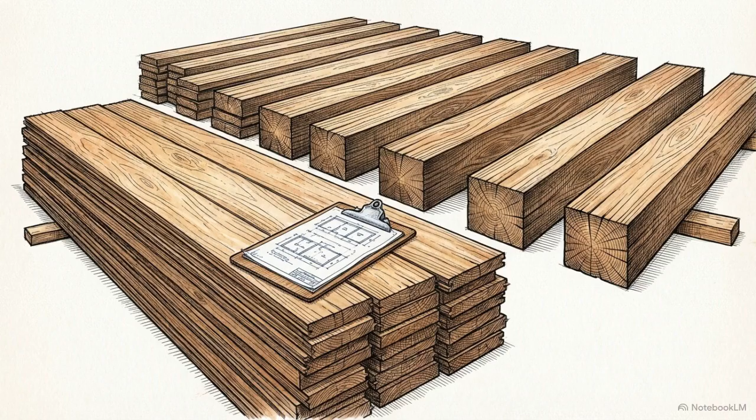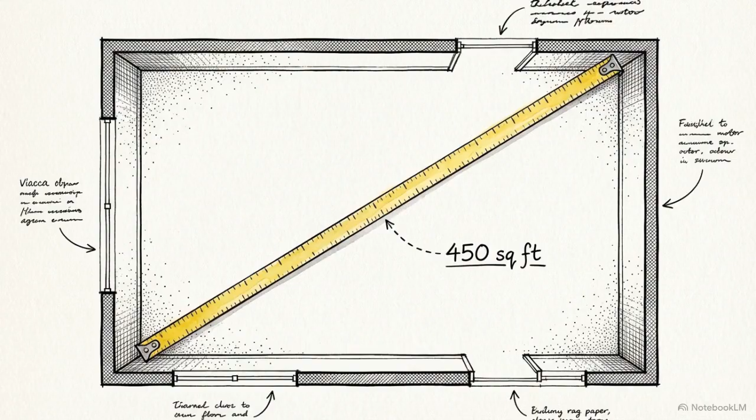Running these exact numbers before you begin construction is the only reliable way to avoid wasting expensive materials and to guarantee the floor can safely support people and furniture. Step 1 in our 6-part sequence is measuring the total floor space of the room. You take this physical area measurement and check it directly against those upfront material calculations to ensure you have exactly enough timber on site before you start cutting.

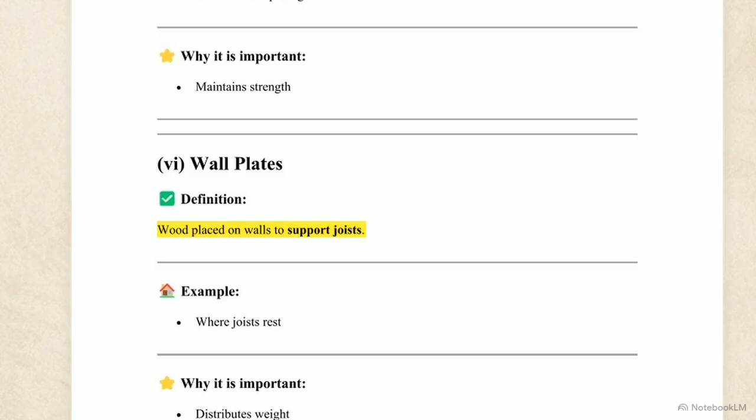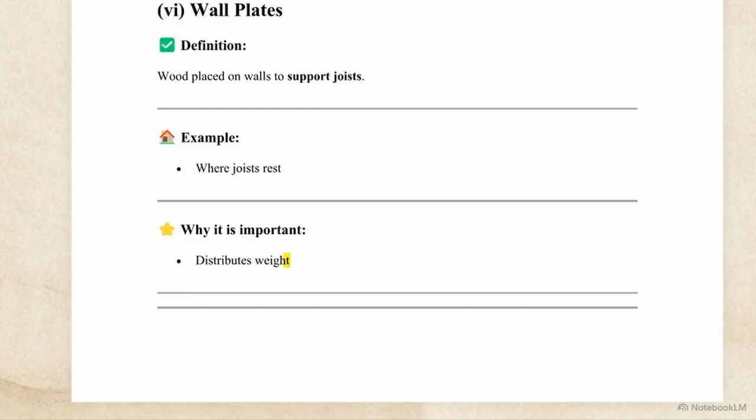Once measured, Step 2 is fixing the wall plates to the foundational walls. Here is the definition for wall plates: lengths of wood placed directly onto foundational walls. Their primary job is providing a resting place for joists, distributing the floor's massive weight evenly across the concrete base. Securing these plates perfectly level creates an unyielding structural baseline. If this lowest layer is crooked, every subsequent layer stacked on top of it will fail.

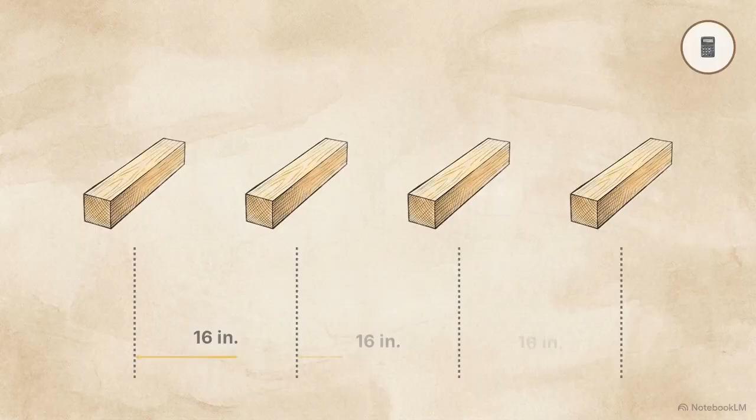With the baseline set, Step 3 is installing the joists so they rest directly on top of those secured wall plates. This section of the manual defines joists as the long wooden beams placed under the floorboards. They act as the main skeleton of the structure, carrying the actual physical weight of the floor itself. As you lay these beams down, you must space them completely evenly. This requires checking your level constantly across every single beam as you work across the room.

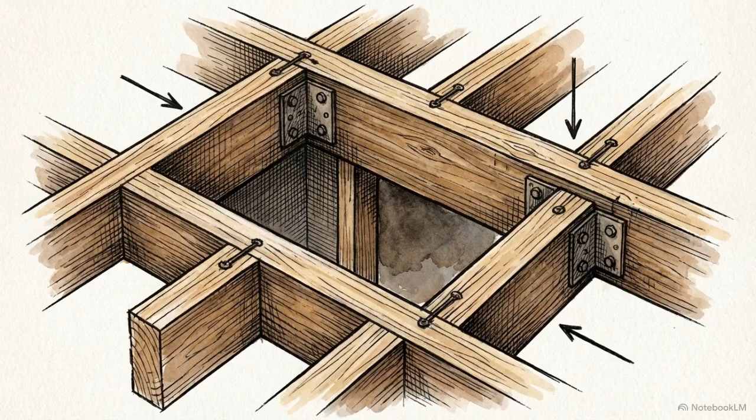When you cut standard joists to make that trimmed opening, you lose support. To fix this, you install a specific heavy beam called a header around the opening, which ties the cut joists together and maintains the floor's overall strength. The entire integrity of the floor relies on this grid. Rushing the spacing or failing to support trimmed gaps with a header guarantees a compromised floor.

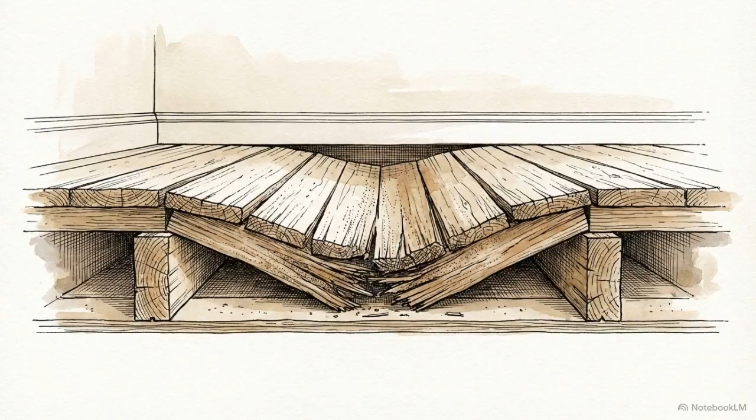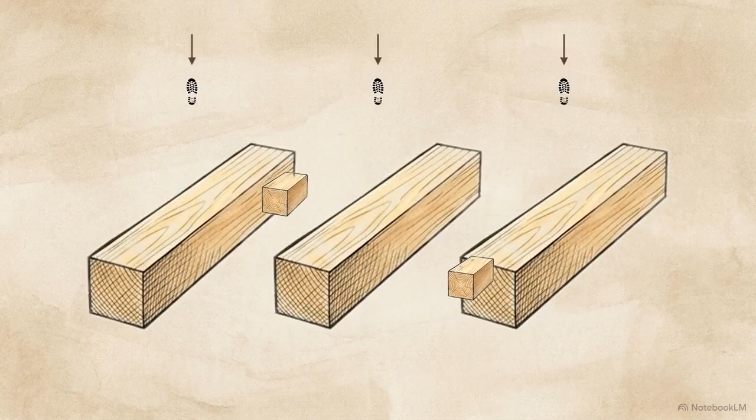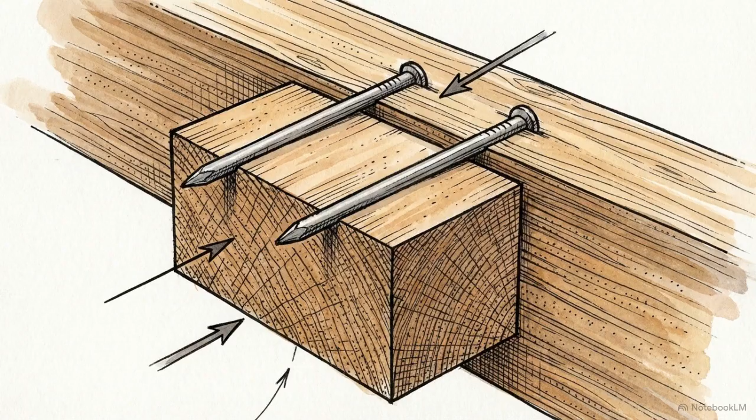With the main joist skeleton set, Step 4 is adding bridging. Bridging involves taking smaller blocks of wood and wedging them tightly between the long, parallel joists. These blocks act as mechanical braces. They keep the long joists completely steady and prevent them from twisting or moving side to side under the heavy load of foot traffic. Stopping that lateral movement now prevents the joists from rubbing together, which is the primary cause of floor squeaks. These connections force the individual beams to work as a single unit, which prevents the joists from twisting when you walk across them.

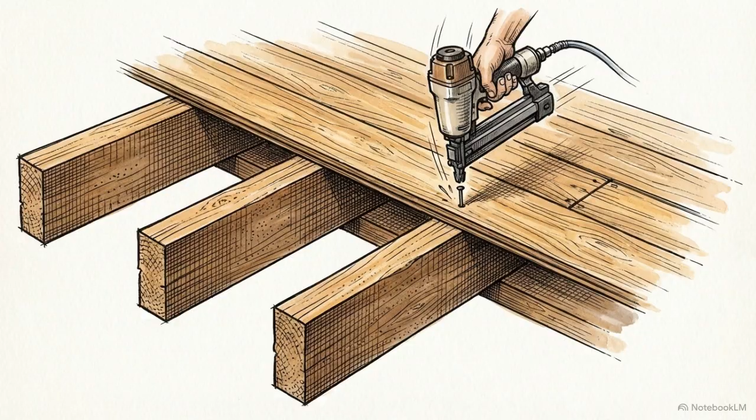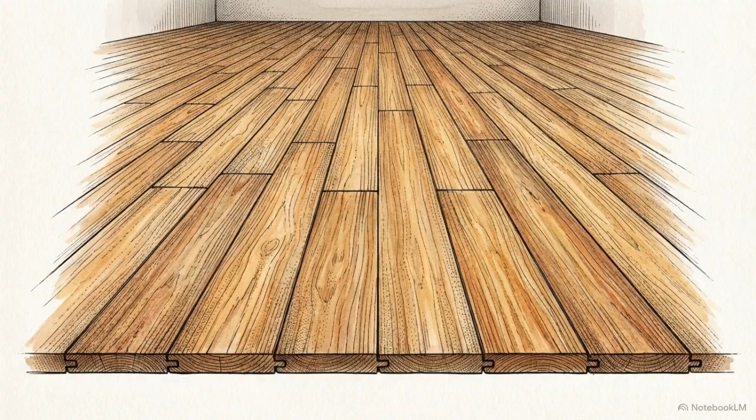Step 5 is fixing the floorboards securely across your freshly braced joists. Looking at our component definitions, floorboards are simply the top layer. Laying these horizontal wooden boards down over the joists physically creates the actual walking surface of the room. Finally, Step 6 is finishing the surface. What you add here depends entirely on the room's final purpose.

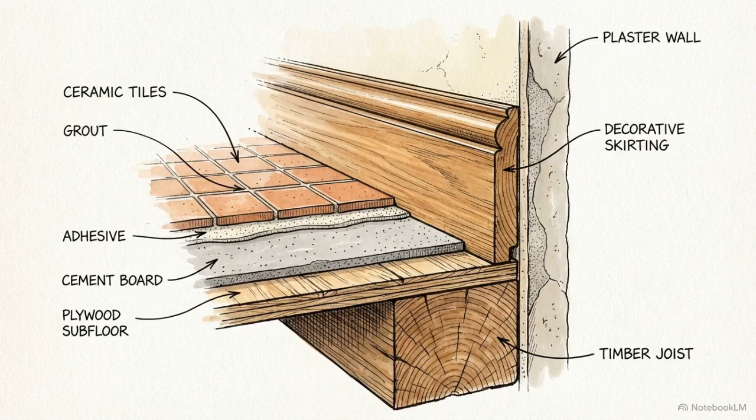This page outlines 2 common finishing members. If you are laying tile, you install a subfloor base layer to add necessary support. At the bottom of the walls, you install skirting boards to protect the edges and improve the room's final appearance. With the skirting and subfloor in place, the rough framing becomes a finished surface ready for daily use. You have now completed all 6 steps of the construction process.

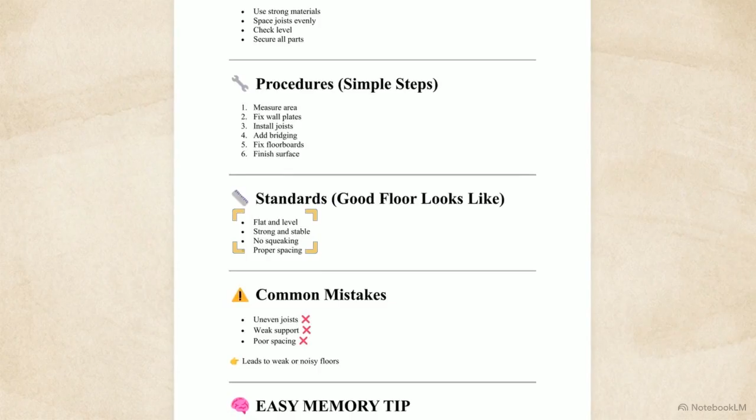But before the job is officially signed off, we have to perform a final quality check. This checklist shows the exact physical standards a successful build must meet. During a walk test, the floor must be perfectly flat and level, strong and stable, and completely free of squeaking.

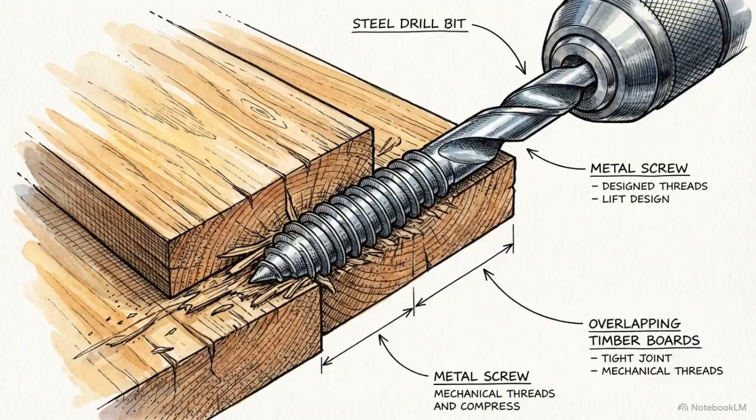To hit those targets consistently on future builds, follow the non-negotiable guidelines. Always use strong materials, rigorously check your levels, and tightly secure every single part. And keep the FTMC acronym, functions, types, members, and calculations, readily available to organize your approach. Following this exact sequence of calculation and assembly ensures the floor remains stable and safe for the life of the building.